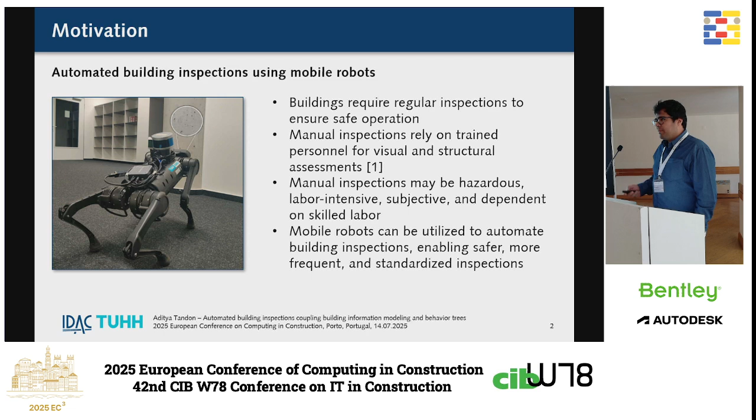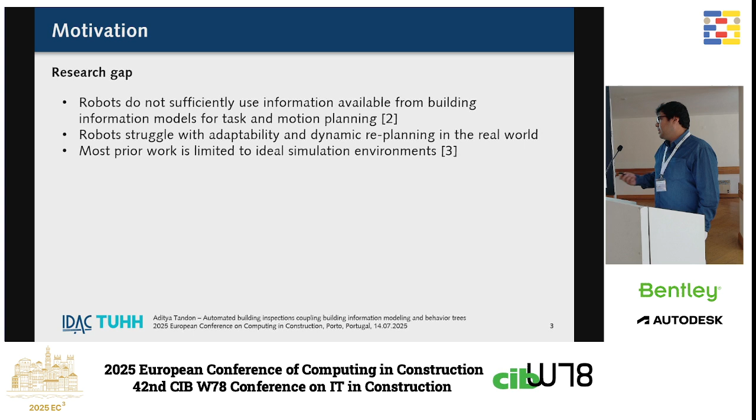But what really prevents robots from being used today to automate building inspections? Number one, most robots still do not utilize semantic and geometric information from building information models, and none of the task and motion planning algorithms for these robots are actually informed by these processes. A bigger thing is that the real world is actually messy, and robots struggle with being adaptable and to dynamically replan in these environments. And what we also found is that most prior work in this direction was limited to simulation environments.

So what we want to do is actually leverage the geometric and semantic information that's available in BIM models to guide robotic inspection missions. So what we're trying to do is integrate BIM software directly with robotic software. And we propose then deploying behavior trees to make the robotic inspection more adaptable and robust in the face of changes between the as-built state and the as-planned state.

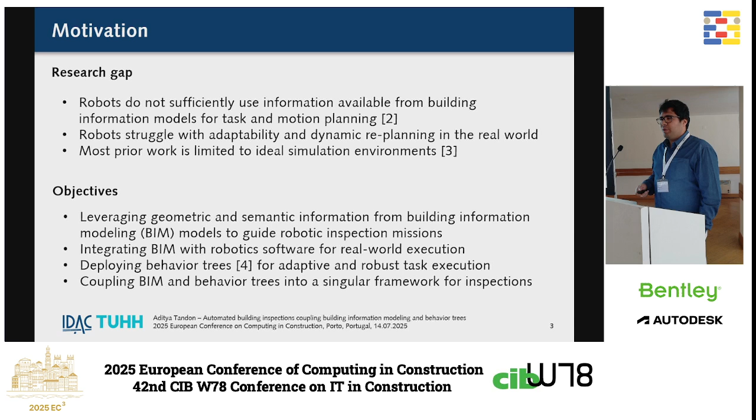Our framework looks at three major modules. The first one is using BIM models and generating tasks from the BIM models itself. Robots still utilize maps that are specific to robot navigation. So in this case, we're still talking about 2D occupancy grid maps. And what we try to do is align the BIM models with these robot navigation maps, so any task that we create using the BIM models can directly be made available on the robot navigation maps.

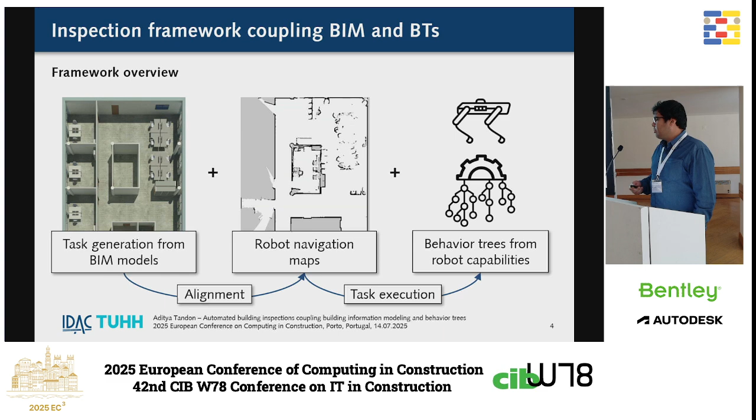To actually perform the inspection, we model the capabilities of a robot using behavior trees. And these behavior trees can then be used for task execution on the robot navigation map. So essentially, this framework then allows us to generate tasks from the BIM models and execute them reliably with robot behaviors modeled as capabilities.

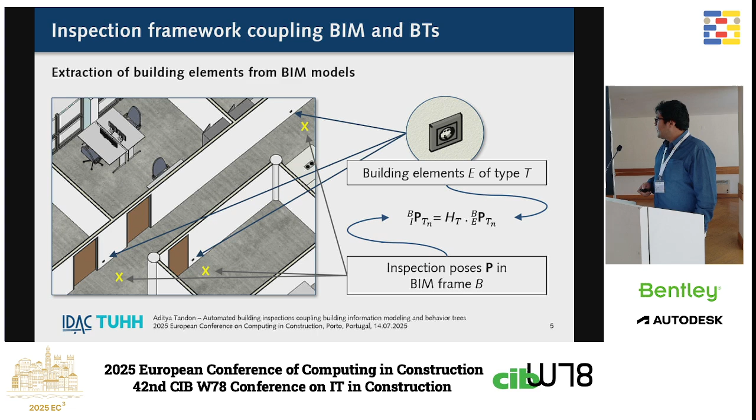To look at the first component, we actually take a BIM model and we extract the relevant building elements. So in this case, we look at certain building elements of type T, which are electrical sockets or electrical outlets. And we then calculate the inspection poses that are required to actually perform this inspection. In this case, we are limiting ourselves to visual inspections. And we calculate the inspection poses P that are required based on the pose of the element from the BIM model. This is determined using a predetermined homogeneous transformation, which is suitable for the type of building element that needs to be inspected.

The second component of the framework focuses on aligning these BIM models with robot navigation maps. To do this, we use fiducial markers. In our case, we're using April tags. We place April tags at corresponding locations between the BIM model and the actual real world. What we are trying to determine here is this transformation, BTM, that allows the alignment of the robot navigation map with the BIM model frame.

To do this, we now calculate the other transformations. The robot frame R and the map frame M are already related with one another by the transformation MTR at time t. This is known through the internal localization system of the robot. We also know the transformation BTA, which relates the BIM model to the April tag frame, since we've placed the April tags at the corresponding location. And when the camera of the robot observes the April tag, we then determine the transformation RTA. This allows us to complete the transformation chain and determine the transform to align the robot navigation map with the BIM models, essentially allowing the calculation of BTM.

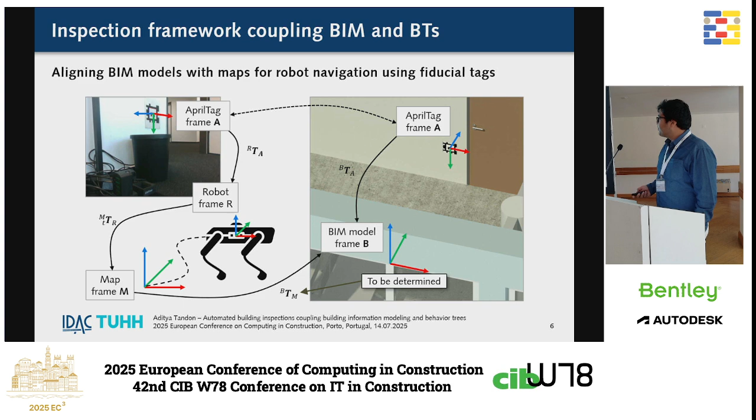The last part deals with expressing robot capabilities in the form of subtrees. As an example here, what we use is the navigation subtree. As the navigation subtree is ticked, the robot checks whether it receives the goal or not. As the goal is received, it checks whether the robot is already at the goal position or not.

When the robot is not at the goal position, we can now plan our path in the environment, and then pass this on to a module that oversees the motion planning of the robot. And when this is executed successfully, the ticking of the tree ends. In case it fails, we have a navigation recovery option that allows recovery behaviors to be executed to allow for reliable task execution.

Another example of a behavior tree that we use here is actually the visual inspection subtree. What we say is that when the robot is at the inspection location, ideally the robot will then want to check whether the camera is available or is on. In case not, we have options to relaunch the camera or launch the camera in the first place.

And then check whether the object detector, to check whether the element that it's supposed to inspect is actually visible or not. In case that is not visible, the object detection module can again be relaunched. When everything goes well, we can capture the image. And in case something here fails, we then move to the visual inspection recovery mechanism.

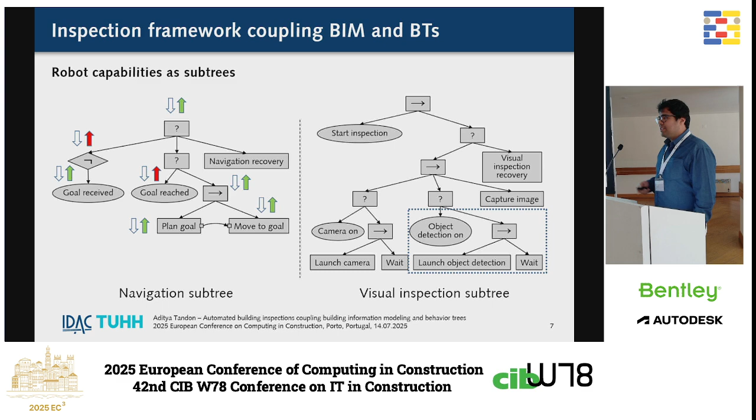To implement this, we implemented the whole framework in Python and with the Robot Operating System. We extracted building elements and calculated the inspection poses using IfcOpenShell, and utilized the AprilTag ROS library for detecting AprilTags, and the SciPy library for optimization between the BIM alignment with the map frame.

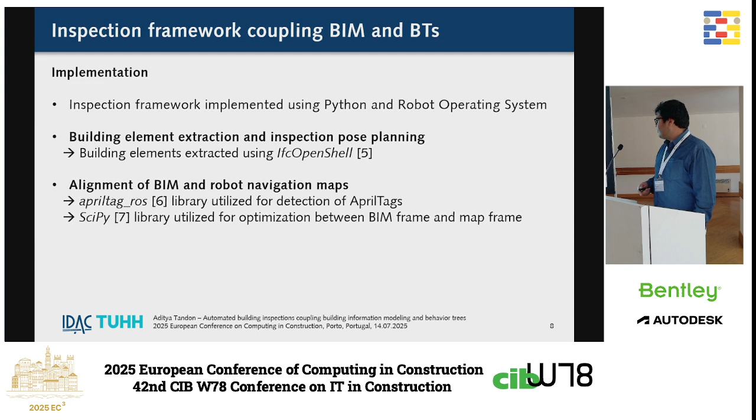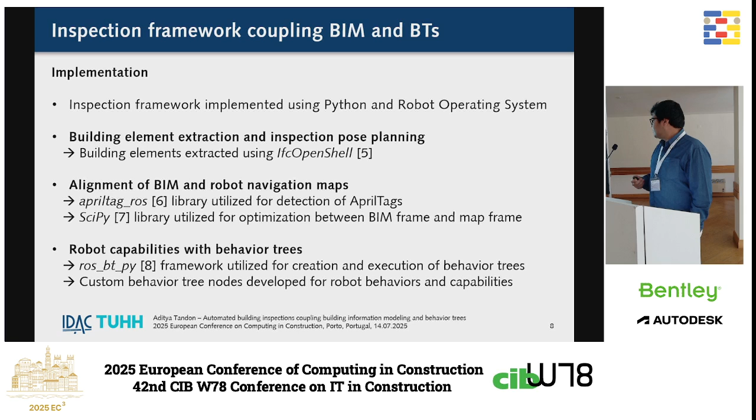Lastly, the robot capabilities with behavior trees were developed using the ros_bt_py framework, but we extended this framework heavily to allow custom behaviors and capabilities to be modeled and then implemented.

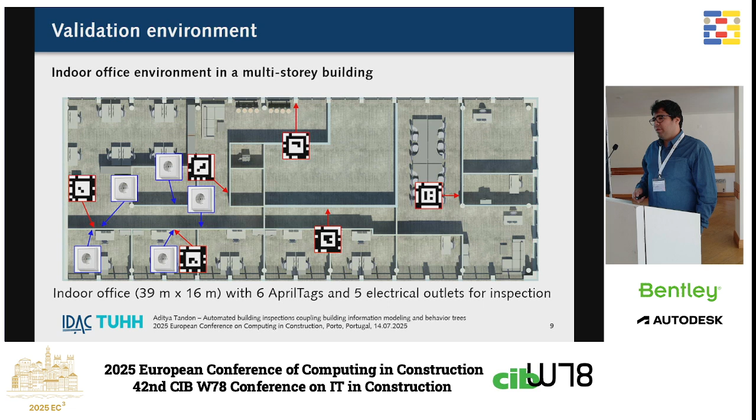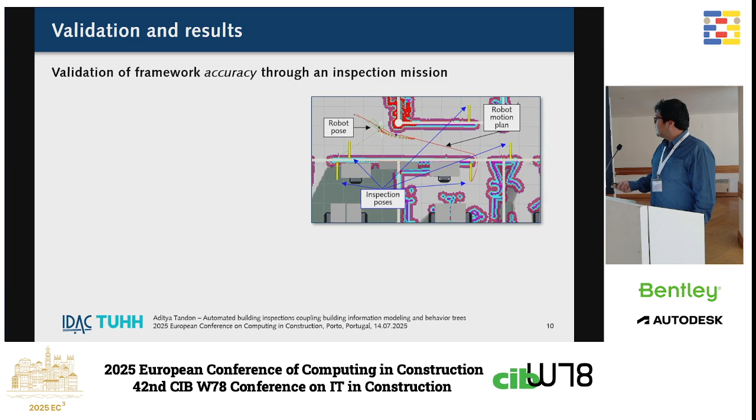We then validated our framework in a real-world environment. So what we have here is actually an indoor office environment with multiple electrical outlets and AprilTags that have been placed at corresponding locations. And we wanted to primarily validate, number one, the accuracy of the inspection framework and also the reliability of the inspection framework. So to validate the accuracy of the inspection framework, we plan an inspection mission.

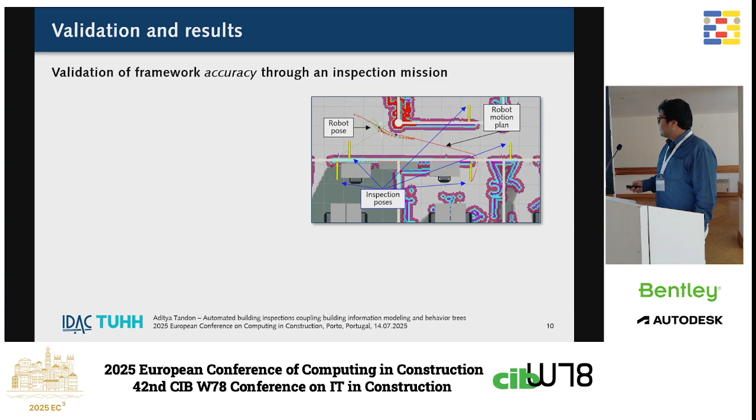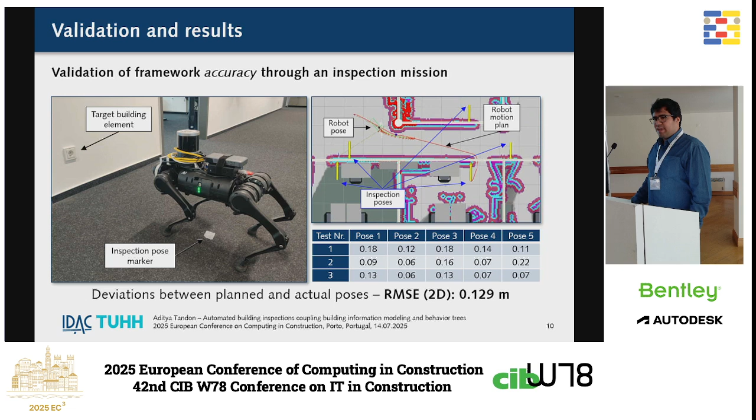And what you see here are actually values in meters, which are deviations between the actual robot position and the inspection pose marker. We have an overall root mean square error in 2D only of about 13 centimeters, which we deem to be satisfactory for the case of visual inspections.

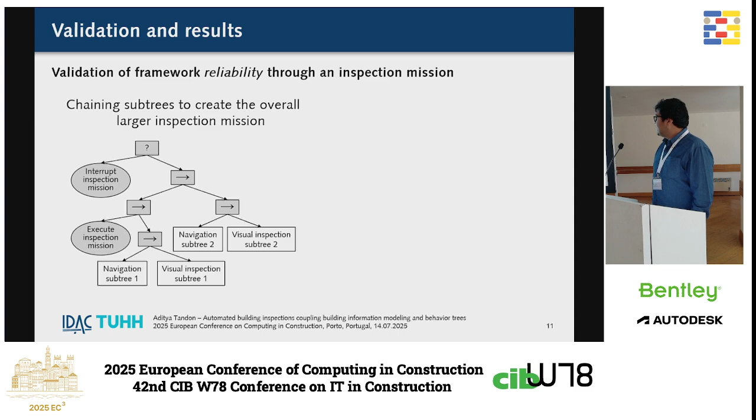So what can be seen here is that as certain modules become unavailable, or as certain modules fail to adapt to real-world environments, this framework that utilizes behavior trees actually allows robust execution in these regions where there could be significant deviations between the as-built state and the as-planned state in the BIM model.

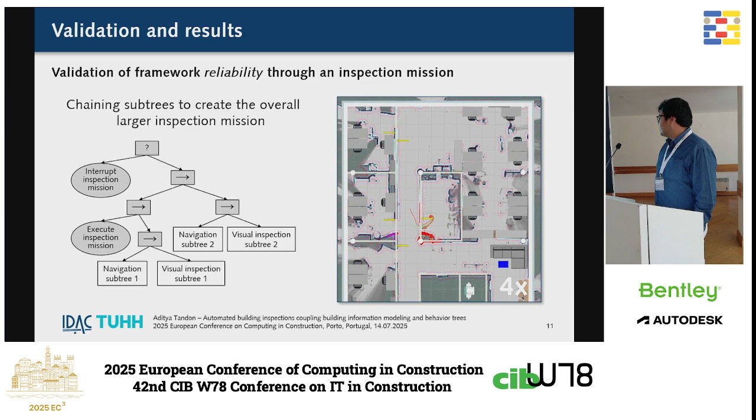What you see here is the navigation of the robot to the last navigation waypoint, where it now inspects the last building element. So here is an example of the images that were actually captured during the visual inspection. As you can see, the socket was identified and was then captured during the complete inspection mission.

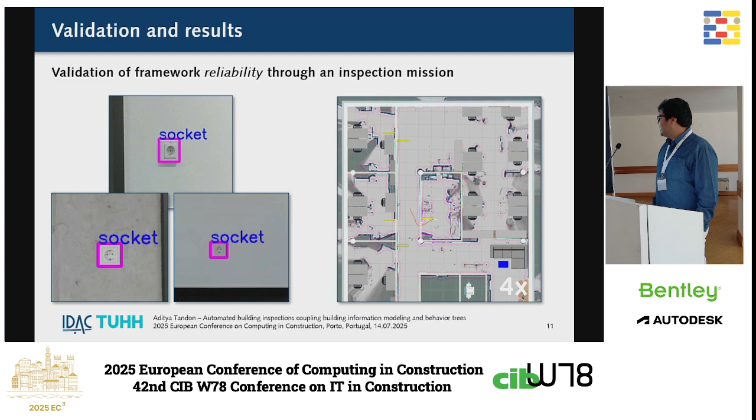To summarize our work, we find a way to enhance our task and motion planning algorithms by leveraging BIM data, and we find a way to reliably perform inspections in real-world conditions, which actually are still messy. And we realized that we were able to successfully execute all of this.

In future work, we look to extend this framework for different building elements and different inspection types, and also along with multiple robots. And what we also want to explore is how these BIM models can be aligned with robot navigation maps without actually modifying the environment, so without actually adding AprilTags in the environment. And that's all.